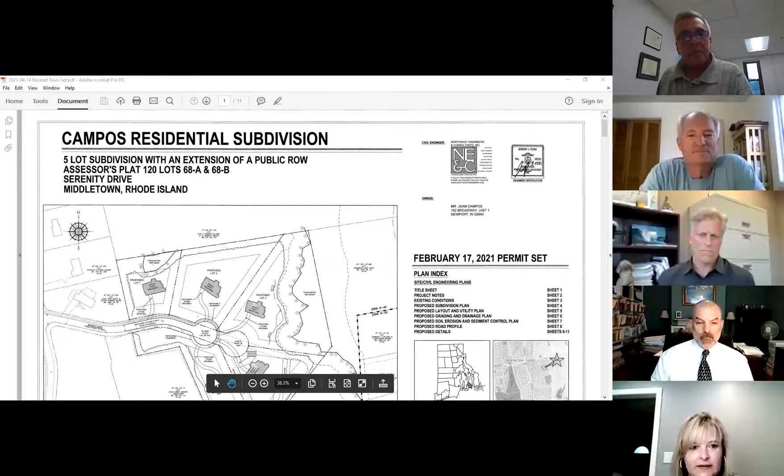Okay, so you should have received a copy of this plan in your packets or digital or however that's being done these days. We have our general notes. Here's an existing conditions plan just to recap. I'm sure you've seen this. This was part of the master plan submission that we sent, I think it was about a year ago now. But just as a quick recap, we have 2 existing lots of record. The total land area is about 9.1 acres when you take those together.

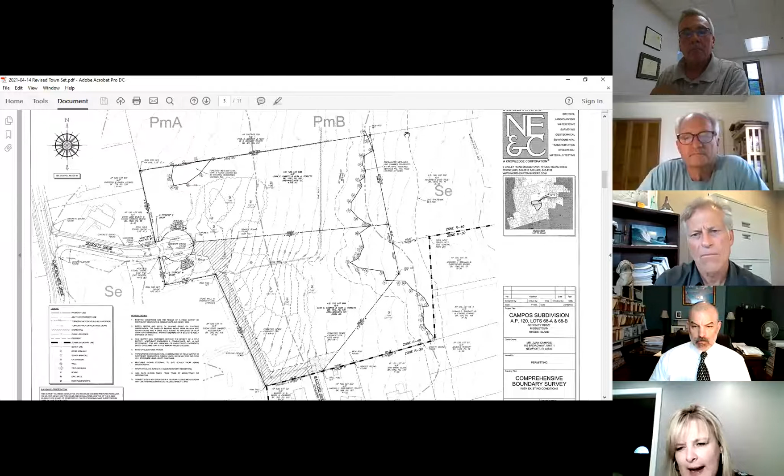Serenity Drive ends in a cul-de-sac within these 2 properties, which would be serviced from individual driveways right now. There's an existing sewer easement that runs down the property line and ties into Maidford River Road. We have a wetland series towards the rear portion of the site, which is your east side, that comes off of the Maidford River stream there. The 200-foot riverbank wetland. Can you see my hand, my little hand? Okay, that is your 200-foot riverbank wetland offset line.

The freshwater wetlands associated with the property extend farther into the site than that 200-foot riverbank wetland. And then on top of that wetland feature, we have a 50-foot perimeter wetland. There's a small isolated wetland in the northwest portion of the site, and that one is too small to be subject to a perimeter wetland by the state regulations.

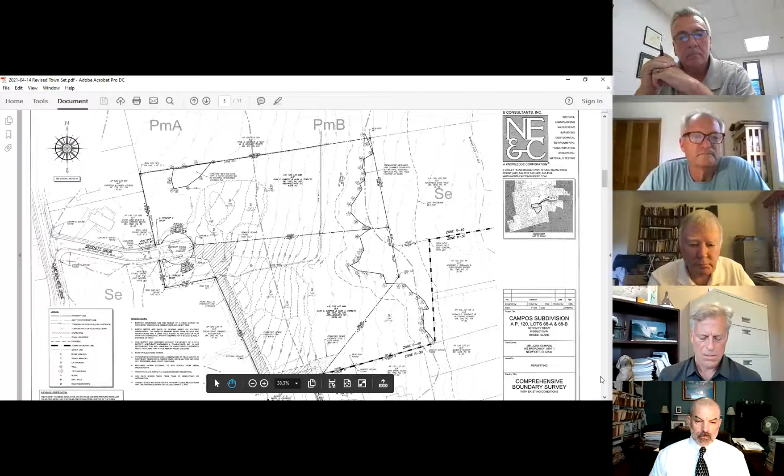The site is an R40 zoning district. By land area and developable land area calculations, the site would support, I believe it came out to 7 or 8 lots by density. We worked with the owners and they decided to propose a reduced density project and only have 5 lots.

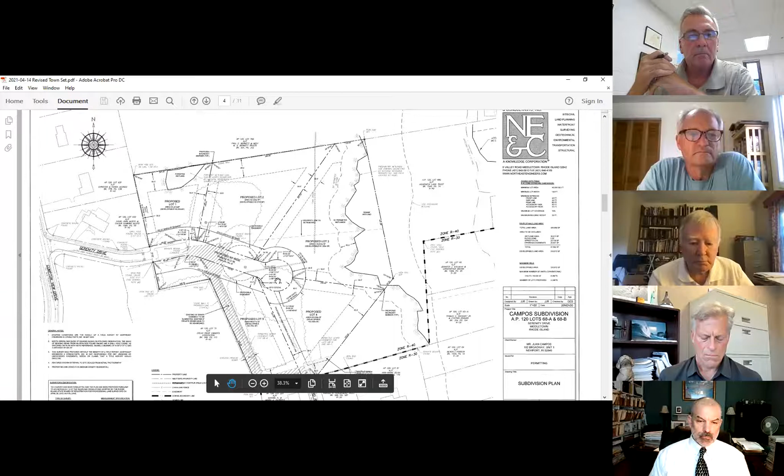So here's the subdivision layout plan. We have 5 lots that go around the proposed right-of-way, which is an extension of Serenity Drive that you can see here on this plan. Now, what we're doing to try to help offset some of the impacts, because it's agreeably a sensitive site where it drains towards the Maidford River and its associated wetlands. So we want to make sure that we minimize any impervious as much as possible.

So besides reducing the density of this project, we also reduced the roadway length as much as we could while still providing direct access to the roadway to each of the lots. So if you can see here on the plan, this round circle here, this is where if we were going to do a conventional roadway for full length of frontage on all of the lots, we would bring that pavement all the way up here. We worked with the planning board and took your Conservation Commission board's comments into account when we did the design work and shortened that impervious surface up.

So we are providing enough depth into the site so that each property can be accessed from the cul-de-sac or the new roadway with its own driveway. So we have no shared driveway for this, but it does have reduced paved frontage. So it's kind of a win-win for fire safety where we have direct access to the main roadway, but reduced impervious to minimize any additional runoff to the drainage, to the wetland area.

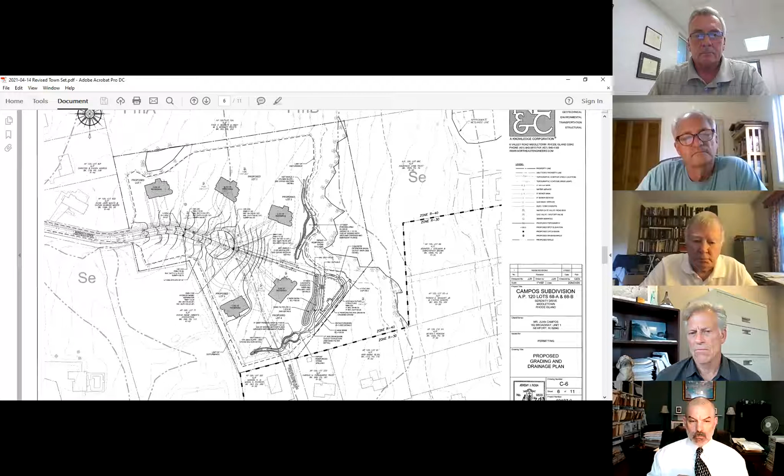That's what this is. And then once we get that water quality treatment, we'll be mitigating the stormwater runoff from the site within the detention basin. So the project reduces the peak runoff for all your design storms from existing to proposed. So we will not be proposing an increase in the runoff.

Can I ask a question? Can you go over again what all empties into that sand basin there? Is it just runoff from that adjacent land, or do the ponds and the swales feed into that sand filter also?

So what happens is basically the water that's collected in the roadways is going to go through a hydrodynamic separator, and it's going to be piped into the sand filter that's here. And that will overflow into the detention basin. Rooftop areas within the site will be captured. Anything that's not captured within the roadway drainage system will be captured in this swale that's located on lot 3, or the swale that's located to the rear of lots 4 and 5.

Those will provide the water quality treatment, and then they will discharge to the detention basin. And then this triangular-type basin that's farthest down the hill, that's the one that provides the metered outfall so we can control your peak runoff.

All right, so those ponds that are indicated there, they have water treatment capabilities within? Yeah, so these ones that are running alongside the wetland area and then intercepting anything that's going towards Maidford River Road, sorry, will provide some water quality treatment and convey that stormwater to the detention basin. Okay. Thank you.

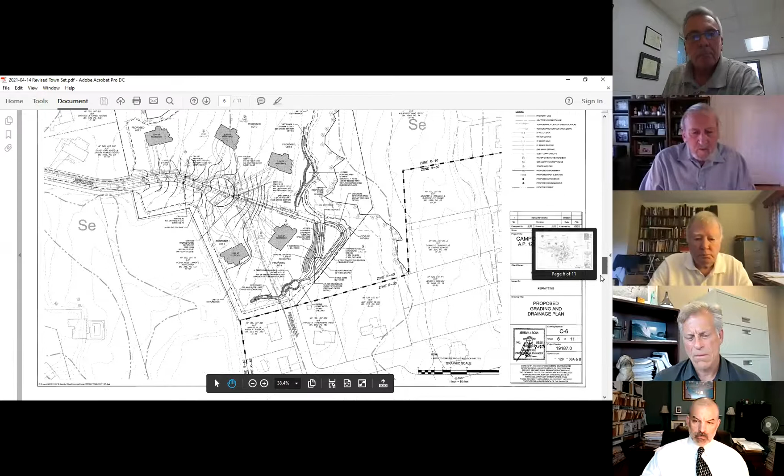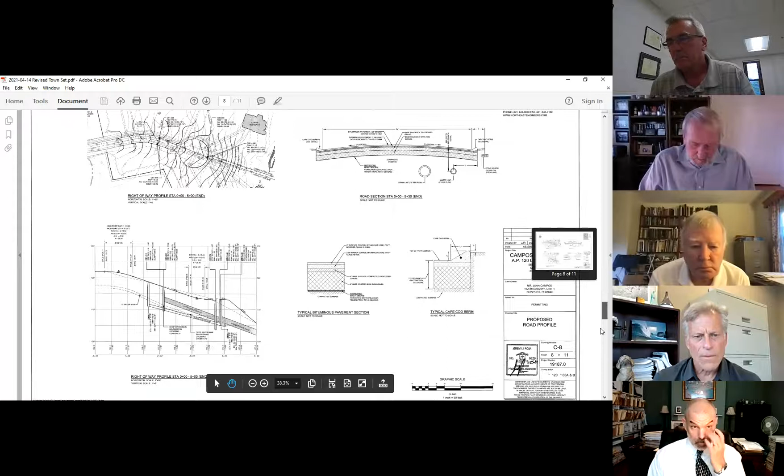I mean, that basically sums up the designs. The rest of the plans include your soil erosion and sediment control. So during construction, we're going to make sure there's no sediment that runs off to adjacent properties. This is a requirement for all developments in Middletown. And then we have our road profile on the next sheets, and then just details for the project.

Is there an issue with runoff from the property to the adjacent properties? So there's no issue before construction in that land? No, I mean, by this development? There was a concern on the site with runoff from this property. The neighbors on Maidford River Road felt that this property was draining into their property. If that was happening, we believe that was a result of when they put that sewer line in for the previous subdivision, and they took out a stone wall that was located at the end of this roadway. And I believe that's been temporarily constructed with a berm.

Okay. So are you improving the drainage with this construction project? Yes, this project will provide full water quality treatment for all your impervious surfaces, and you will have a reduction in your peak runoff. Okay.

Lynn, I have a question. Yes. A couple, actually. Describe the grade or the topography there going from Serenity Drive, kind of left to right, which is west to east across the site in this developed condition. You said all the water tends to flow to the east, which is to the right side of the screen here. So that's question number one, if you can describe that.

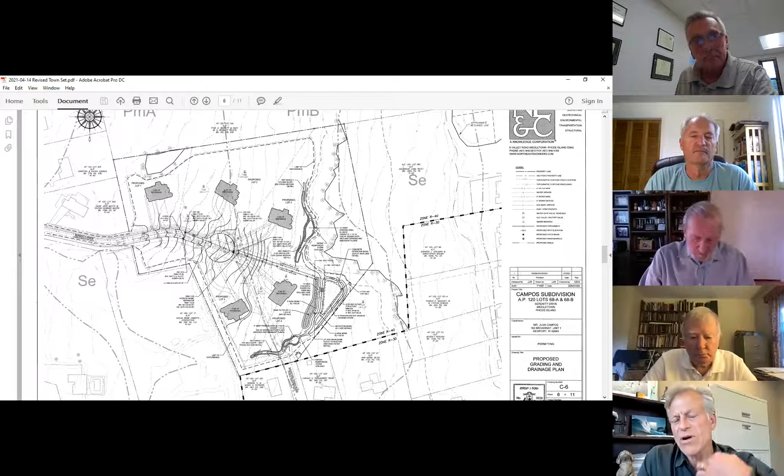Number two, so these systems will capture runoff from the driveways, or will the driveways be kind of material of homeowner choice, pervious or impervious? You know, will they be gravel driveways? Will they be asphalt? Is that subject to be determined down the road, or what?

So, right, usually what happens is we do the design with placeholders for houses and driveways. And then if the construction of the individual lots exceeds that amount of impervious, they're going to be required to mitigate that on their own. And we'll be able to control that through the soil erosion and sediment control plan process. It's proven to be successful, I believe, with the last projects. We've got the Middle Creek project that we did this for, and the Saltwood Farm project that's in process where we're doing that. And you have a very straightforward rule: this is what you're allowed, and if you do more, then you have to mitigate it on your own. And it seems to be working well.

For this project, we have 3,000 square feet of footprint for the homes, and I believe we allow for up to 4,500 square feet of impervious, but I need to double check that. I'm sorry, in our stormwater design, I believe we allow for up to 4,500 square feet of impervious area per lot. So the houses could get bigger, but they would have to do a pervious driveway, or they can do a paved driveway if it's less than 1,500 square feet.

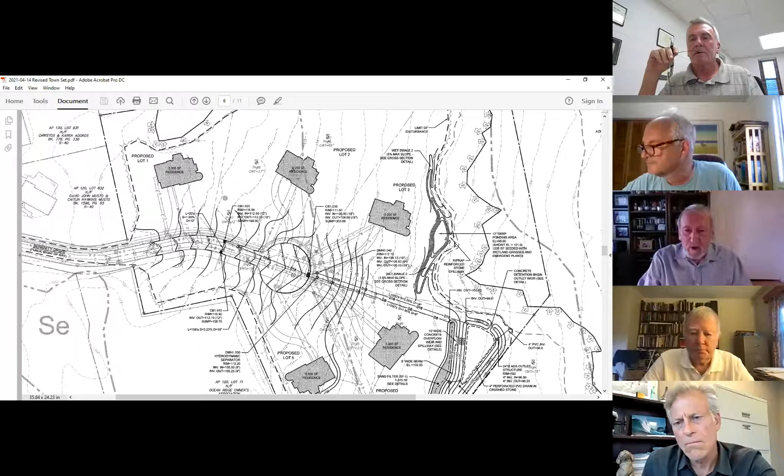I have a question myself on swale number 2 on the northeastern part of the property. Why can't that extend a little farther north than what it does right now? Because it looks to me like there's about 125 feet of, you can't see the full thing on your drawing there, but now it is. But it looks like there's about 125 feet of uncontrolled boundary. They're receiving runoff from a large open space area that will flow unmitigated into the wetlands area. So is there any reason why you can't or didn't want to extend that a little farther north?

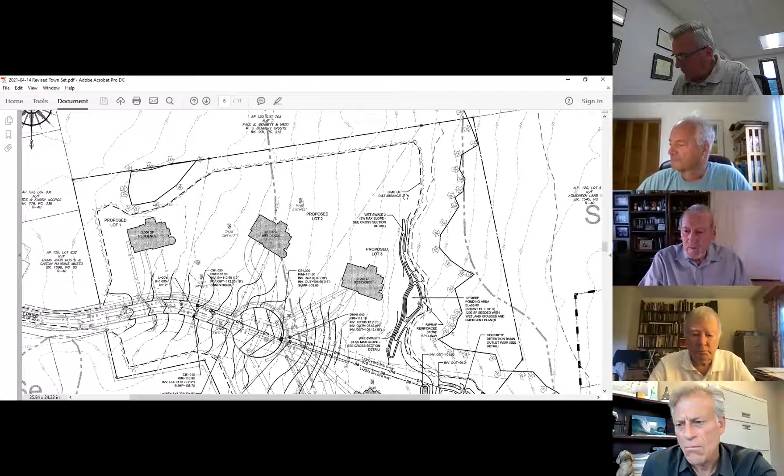I mean, the goal is to capture the impervious area. We can extend it further north. It's just going to intercept more of the runoff that goes through the wetlands. So we'd have to evaluate to make sure that doesn't have any adverse impacts on the outfall that we're getting from the drainage system, because we'll be putting more water in it if we're intercepting just runoff from grass.

I was just a little bit concerned. There is a note on the drawings which said, I believe this is true, all soils on the site are considered low permeability soils. So you're probably going to get a pretty fair amount of runoff occurring.

Yeah, you're absolutely right. Many of the soils on Aquidneck Island are considered low permeability. You can infiltrate into them. We have septic systems on all of Portsmouth and a good portion of Middletown and a good portion of Newport. So the soils do infiltrate, but they are not very permeable. So it's not an ideal situation. We're not relying on infiltration for any of these systems.

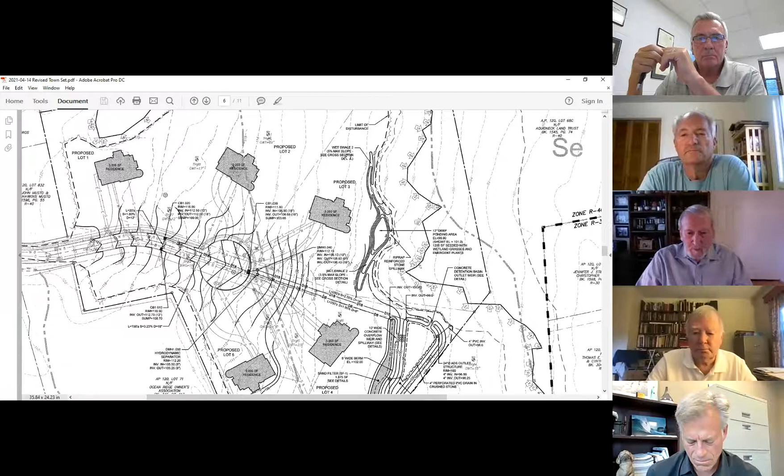Okay, but you're not concerned about excessive flow into the wetlands from that northern section of the property? No, it was modeled. We modeled what was captured in the swale and then what was draining direct into the wetland. We don't just model what we're capturing. We model also the uncaptured areas.

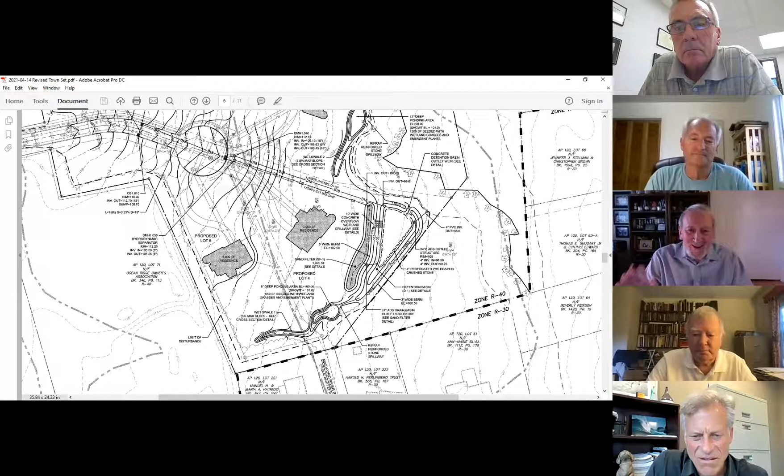Okay. All right, I have one more question near the southern part of the property where you've got that other ponding area there. How come that ponding area is only 8 feet deep where the one up north is 12 feet? Inches. 8 inches, I'm sorry. Yeah, 8 inches itself and 12 inches up in the northern one. Seems to me like you could get an appreciable amount of runoff down between houses into that pond area. Is there a reason for going with an 8-inch depth as opposed to a 12-inch depth?

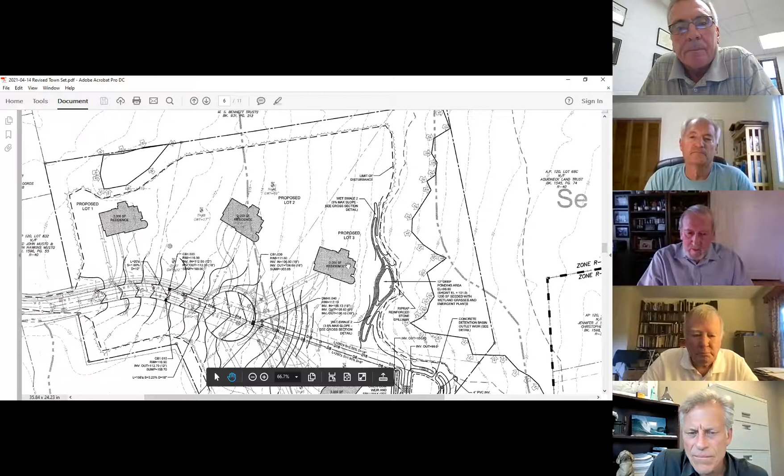It's just the water quality requirement for this contributing area is less than on the north side. You have 3 houses going into this one. You have 2 going into the southern one. And most of lot 4 goes directly into the sand filter. So this is really sized for a much smaller contributing area of impervious. The models show that what's proposed there is going to be adequate.

Yes, and I should say this project went through DEM review; they reviewed the stormwater. We sent it in for a RIPDES permit and wetlands permit, so they did do that combined review. They came back with comments and we made the revisions. Basically, their comments resulted in us making the sand filter bigger than what we had originally designed. The stormwater system got slightly larger, but they were generally okay with the layout. Not that they pay a lot of attention to that. Mostly they review the stormwater system and then the sediment control features that we have.

Lynn, you mentioned a hydrodynamic separator. Excuse my ignorance, what is that? So a hydrodynamic separator is basically a tank that has a baffle in it. It works a lot like a sump on a catch basin, but more efficiently. So you get a lot more sediment removal from the water that flows through. It goes through a baffle, the sediments accumulate in the chamber, and then the water without the sediments continues down and goes into the sand filter.

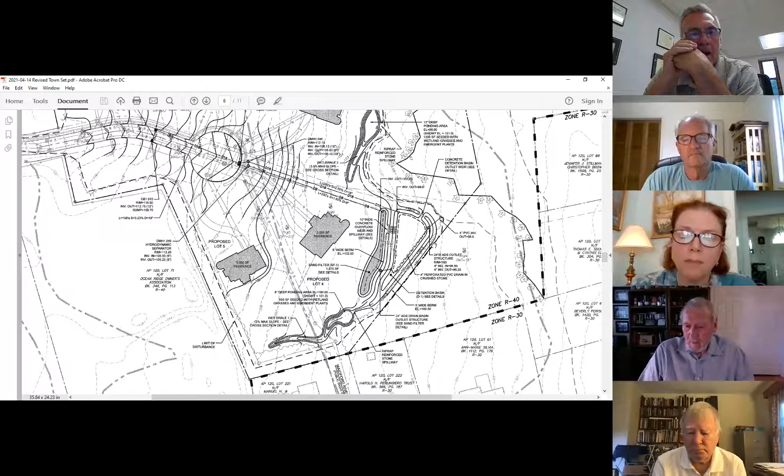So normally a project like this is a residential subdivision. I can talk to the owners about your comments, of course. But there's nothing in the town ordinance that requires homeowners to do a certain amount of landscaping. They don't submit landscape plans to the town as part of their lot development. We do have to submit for street trees for subdivisions. If it were a commercial project, then we'd have to submit an overall landscape plan, but there's nothing right now in the town's ordinance that mandates any landscaping on a residential lot.

Again, Russ and I can talk to the owners about those concerns. I'm sure they don't want to create any hostility with their neighbors, but there's not really a mechanism in place for that. Okay, thank you. I appreciate that. That's very helpful. So thank you for taking the concerns on board.

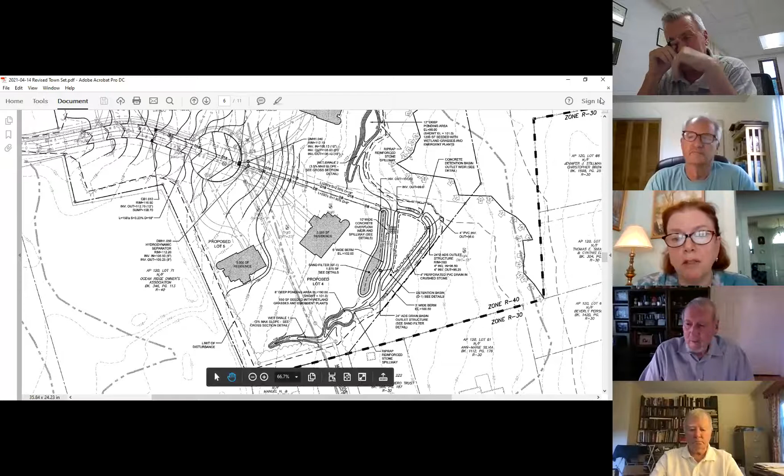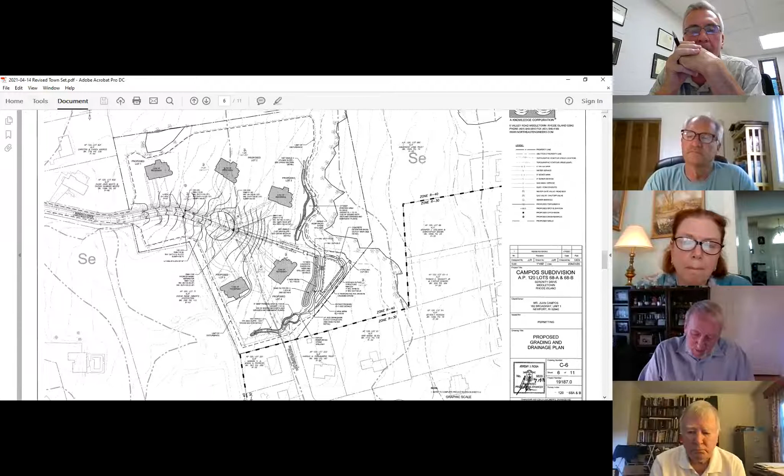You're welcome. Speaking of neighbors, I noticed on the drawing notes sheet 2, under public health and convenience notes, it says the contractor at his/her expense shall keep the project area free from dust and noise. I'm just curious, what's the method that's going to be used to keep the surrounding area free from noise and dust? I mean, I think the town has a noise ordinance in place.

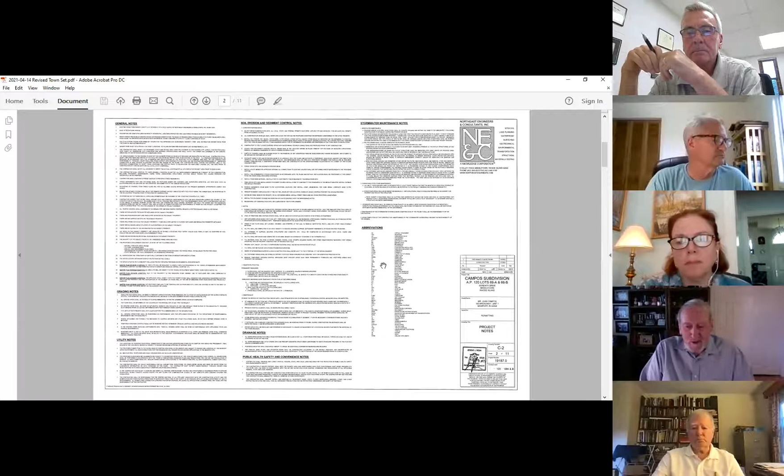Basically, what happens is they try to do the best they can during working hours. But then I'm not sure when the noise ordinance kicks in, but that's when we would have to be more careful with any noise. Obviously, construction equipment makes noise. Right. I think this stated requirement here probably shouldn't... it's not possible to keep the surrounding area free from noise and probably free from dust. Maybe it says something like.

The dust is important to have because some of these are basically just in case the project goes sideways, the town has what they need to be able to go in and make someone do something. And dust is something that we actually need to keep on there because you would be surprised in some projects if you get construction in a real dry period. Like if we're having a drought, it could get really dry. And if all this dirt is exposed, it just blows up in the air and it ends up all over everybody. So what they do is they water it and it keeps it from blowing around. Right.

Okay. Any other comments? What is the issue before us today? Is it to endorse what Lynn has just described? Or is there some other issue?

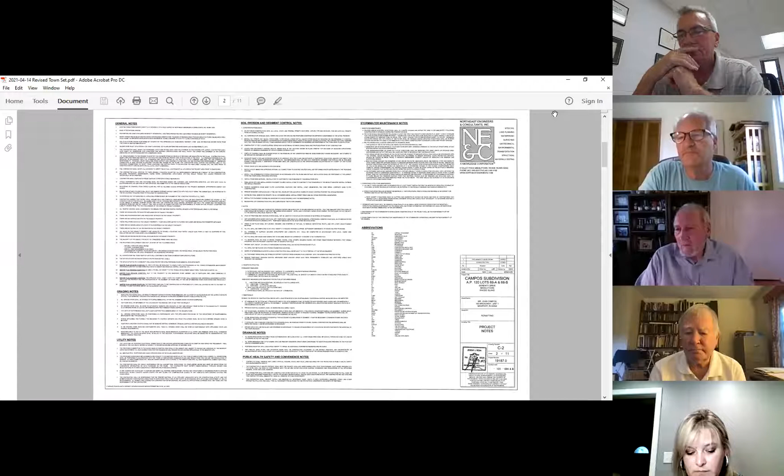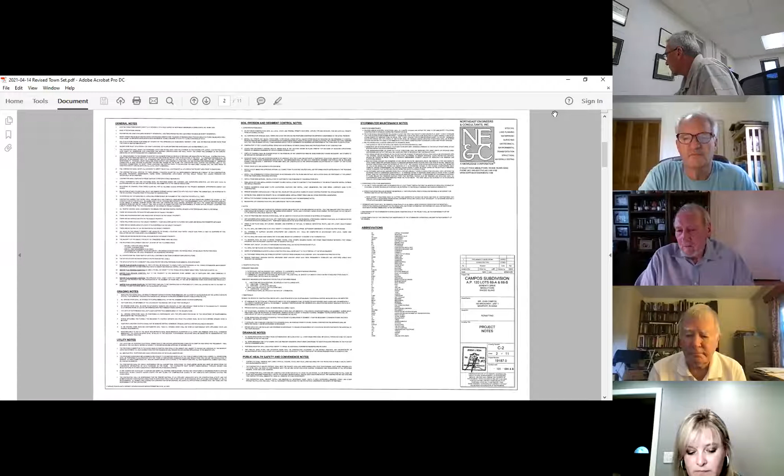Mr. Chairman, could I intervene for just a moment? Yes. David Martland. I'm here tonight representing the Aquidneck Island Land Trust, which owns property that borders the subject property to the east. And the land trust is certainly very concerned about the drainage and the water quality issues associated with this subdivision. Unfortunately, we've only recently learned that the plans for the preliminary application have been filed.

We haven't been provided any of the materials directly by the applicant, who was aware that we were interested in this project at the master plan level, and we appeared before the planning board and indicated at that point that we were withholding comments on the proposed subdivision until this stage, in hopes to be able to review the engineering that was taking place, in particular on the stormwater drainage issues. We have not had the opportunity to review that report, and so can't really comment on that.

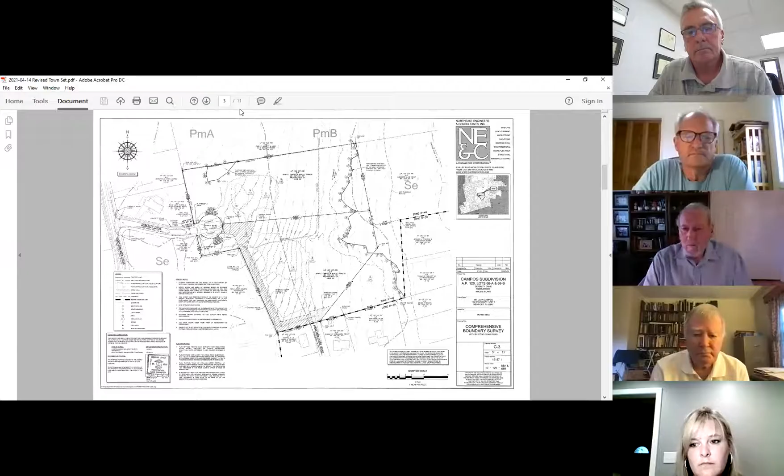We would have some questions that we would like posed that came up during the testimony. I was curious, if I understood correctly, that there has been some clearing of trees on the property. I was wondering if either the applicant's attorney or the engineer know what size those trees were.

Mr. Chairman, if I may suggest, Mr. Martland emailed me earlier today. We have not forwarded anything directly to Mr. Martland, but his client is an abutter and would have gotten notice that the filing had taken place. We understand this has to be reviewed by you, TRC tomorrow, and Aquidneck Island Land Trust looks for more time to review the submission. I think we're okay with that.

I wouldn't have an objection to the commission reserving any recommendations this evening, continuing it to next month. We'll go to TRC tomorrow, probably get some feedback there. We really don't expect that we'll be heard on Wednesday night because this is somewhat of a work in progress. And in the interim, I will provide whatever additional information we can to Mr. Martland and discuss the preliminary plans leading up perhaps to an August planning board meeting. So I think maybe that would be the better course of action. We have no objection to that.